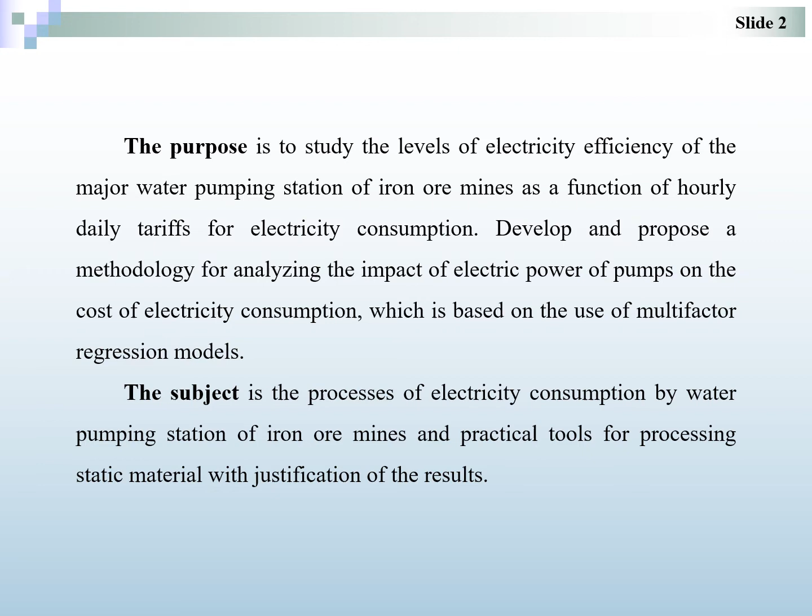To develop an algorithm for controlling the operation of the main pumping systems in a synergistic version of their structure, it is necessary to establish the factors and their levels of impact on the energy of the complex. Slide 2 presents the purpose of studying the levels of electricity efficiency of the main water pumping systems of iron ore mines, as a function of hourly daily tariffs for electricity consumption, and developing a methodology for analyzing the impact of electric power of pumps on electricity consumption, which is based on multifactor regression.

The analysis of ways of increasing the electric power efficiency of functioning of pumping stations of mining enterprises in the conditions of underground extraction of minerals is generalized, probably by optimization of the technology of their functioning during the day, with the transfer of the maximum possible work on water pumping to areas of economic level of payment for electricity consumed. Creation on their basis of reversible hydraulic units. The latter will allow mining companies to produce their own electricity.

In this case, the algorithm of drainage systems is as follows. In the economic hours of the day, from the levels of payment, water is pumped from the mine to the surface into the appropriate reservoirs, and in uneconomical hours, on the contrary, part of the water from these storages is pumped into the mine in the mode of electricity generation.

At the same time, it will be necessary additionally, on the basis of the analysis, to refine the structure of drainage installations in the mode of electricity generation and modernize the pumping units themselves to be able to function both in the mode of water pumping and in the reverse mode of electricity generation. To analyze this process, it is necessary to develop mathematical models for analysis and development of areas of theoretical achievements. This is possible through the introduction of modern systems approaches and mathematical and statistical methods.

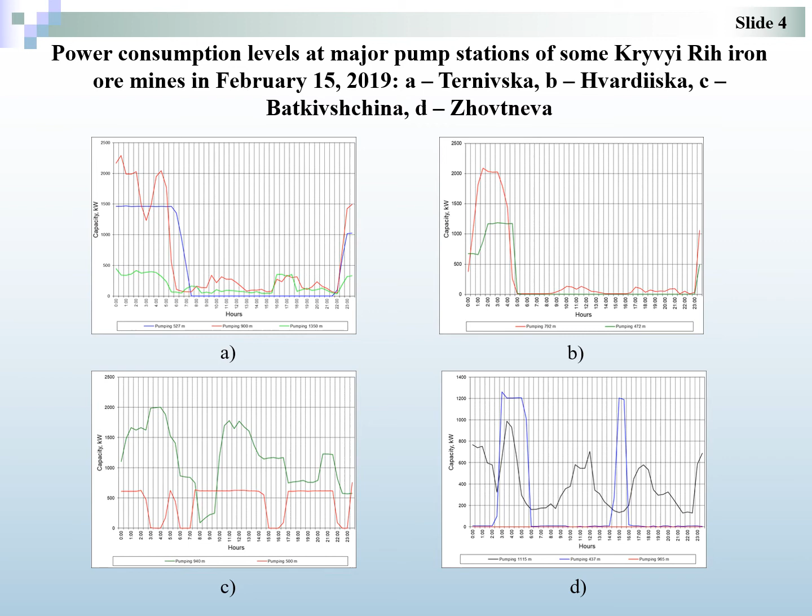The dynamics of the levels of electricity consumption by mines over the years has been studied, and it has been found that they change insignificantly and, rather, tend to be stable. The analysis of the factor space of electricity consumption by pumping units allowed us to determine the main influencing factors in the dynamics of individual iron ore mines, shown in slide 5. They include the depth of the mine, water inflow, number of pumps, pump capacity.

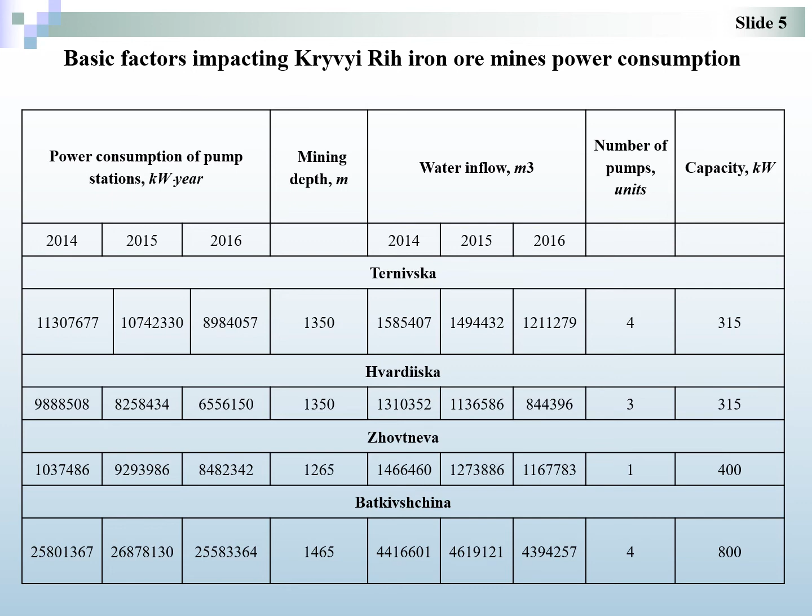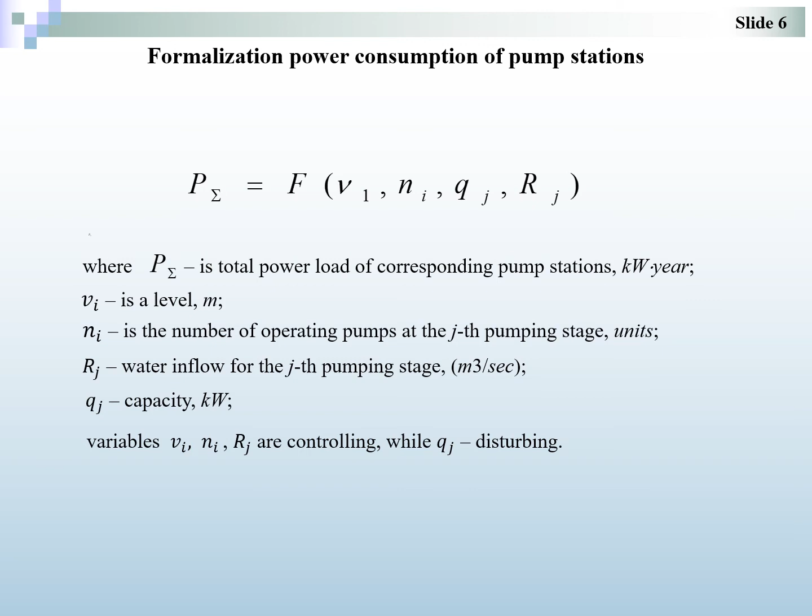Using the main factors of influence, we propose the following formalization of electricity consumption by pumping systems. We propose, in accordance with the system of research, the distribution into control components, which we propose to include horizon, the number of running pumps at the j-th stage of pumping, water inflow at the j-th stage of pumping, and the disturbing factor power.

In accordance with the purpose and objectives of the research, we propose the following statement of the problem of minimizing the cost of electricity consumption when regulating the load of water pumping systems. The solution of such a problem involves in-depth preliminary analytical analysis. Z-scaling was used for comparative analysis in order to have a single system of interpretation of indicators. The presented article presents the results of our research on the Batkivshchina mine.

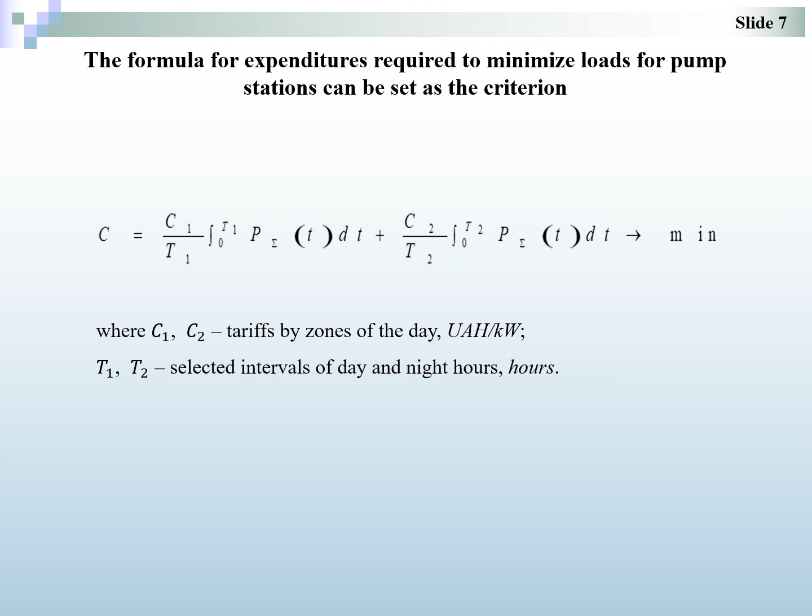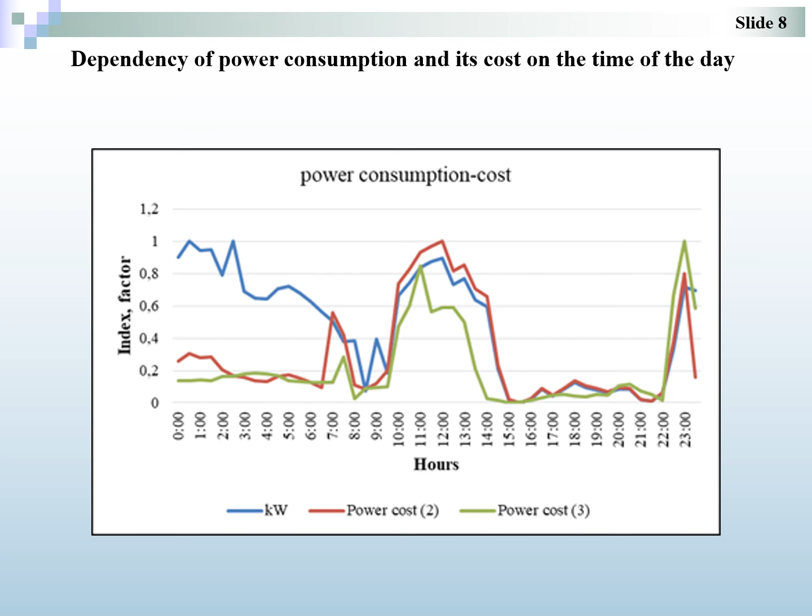Slide 8 shows the dynamics of the cost of electricity in relation to daily tariffs. Summarizing the initial data, we have a total excess of the daily cost of electricity at a 3-zone tariff compared to 2-zone. That is, it is advisable to conduct a multifactor study of electricity consumption as the most effective method of determining the impact of these factors on the cost of electricity consumption. The original data was processed using Microsoft Excel.

Slide 9 presents our multifactor model for the cost of electricity consumption. As a result of multiple correlation analysis, it is shown that the variable x1 can be linearly expressed in terms of x2, i.e. the variable x1 can be excluded from the input variables. The coefficient of determination was 0.824 and Fisher's criterion was 14.1. The tabular value of the Fisher test is 4.07. Thus, we can note the adequacy of the obtained model.

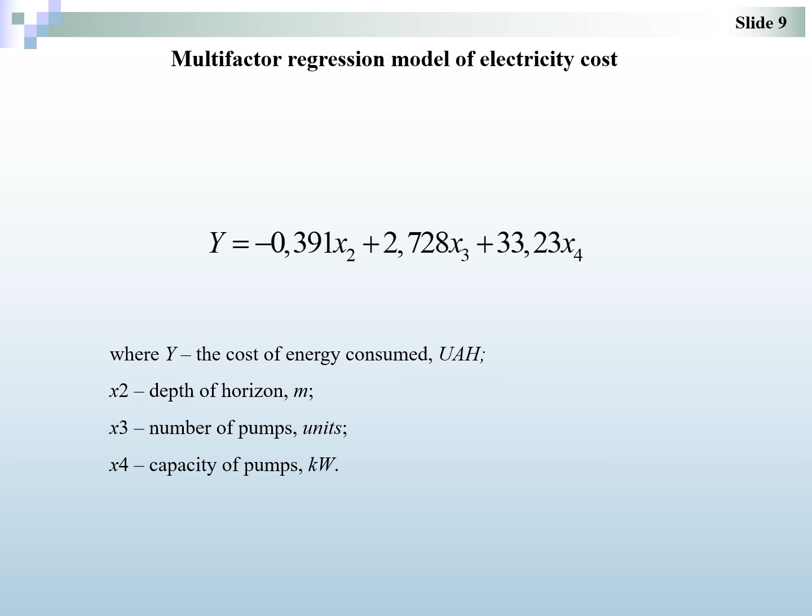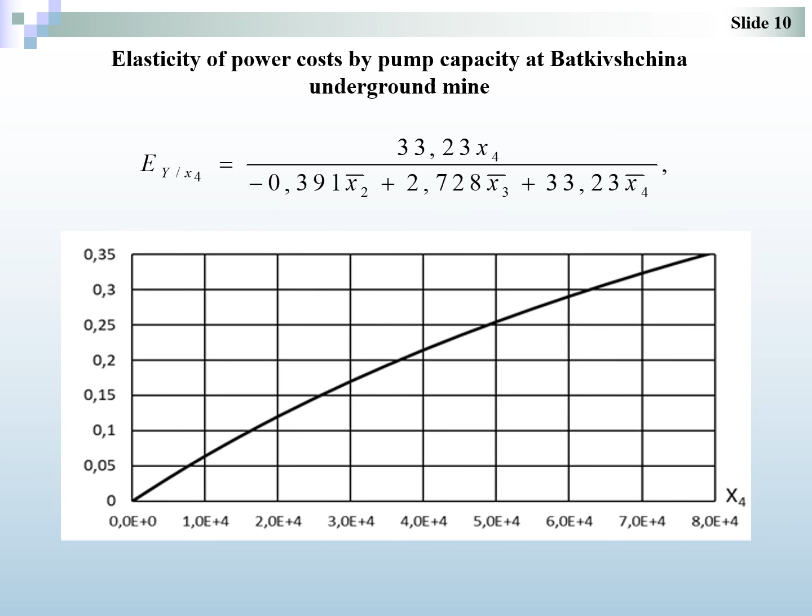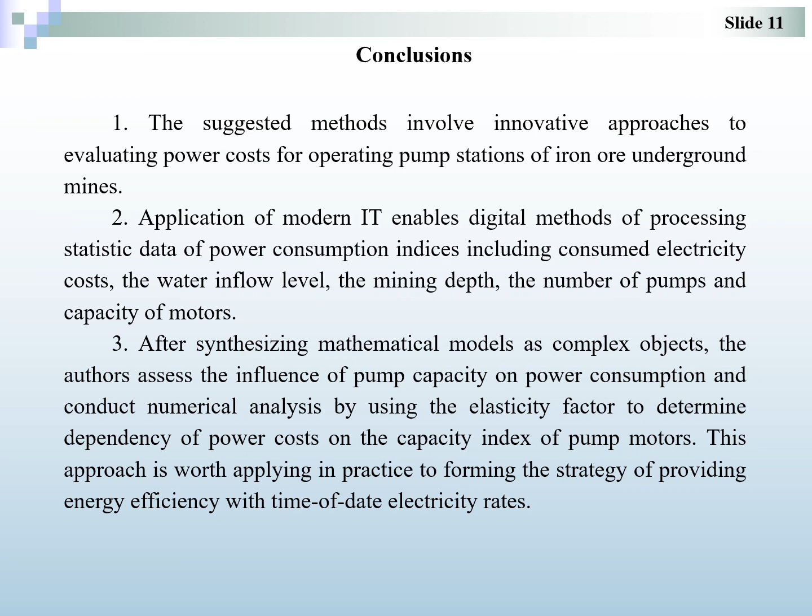3. After synthesizing mathematical models as complex objects, the authors assess the influence of pump capacity on power consumption and conduct numerical analysis by using the elasticity factor to determine dependency of power costs on the capacity index of pump motors. This approach is worth applying in practice to forming the strategy of providing energy efficiency with time-of-day electricity rates.